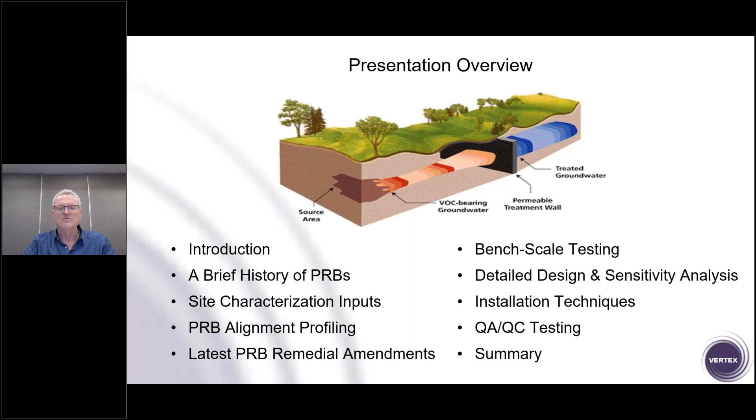As Mike said, my name's Kevin French. I'm a professional engineer here in Ontario. I've been in this game since 1988, doing remediation consulting work, and over the past 10 years or so doing the contracting side of things. Vertex Environmental, if you're not familiar with us, is a specialized in situ remediation firm that started in Ontario back in 2003. So we're coming up to about 20 years of business, and started out doing primarily ISCO work, but then has expanded over the years into also ex situ systems such as water treatment, multi-phase vapor intrusion, and also high resolution site characterization. You might be familiar with that, but I'll talk about it in the context of PRBs in a little more detail later.

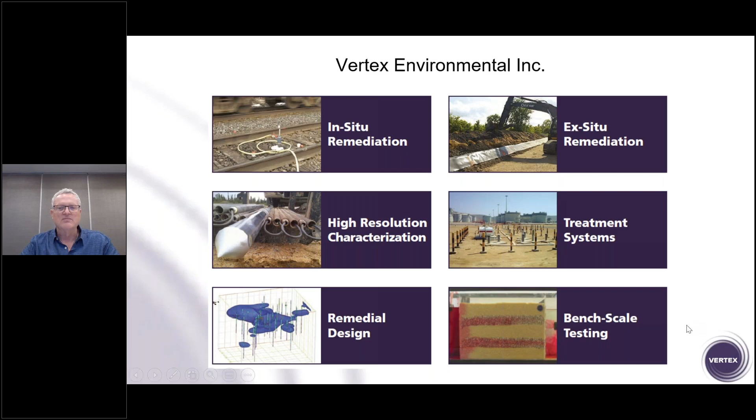Just an overview of the types of services we get involved in. I'll talk about bench scale testing and remedial design, because those are really some components that can be critical to designing an effective PRB.

Excavation and offsite disposal is decreasing over time, driven by cost as well as sustainability factors. We've seen a real switch in Canada, and you've probably seen it in the US as well, away from chemical oxidation and more towards chemical reduction. It may not be as fast, but it's more effective and longer lasting as a technology.

Similarly with bioremediation, there's a switch from aerobic to anaerobic, driven mainly by effectiveness. If you think about dissolved oxygen, it's not very soluble in water, so it's hard to get a lot of oxygen into the subsurface and maintain it. But it's pretty easy to get something else, like sulfate or nitrate, as a terminal electron acceptor into the water, with longer lasting effects and better distribution. So we've seen that swing happen.

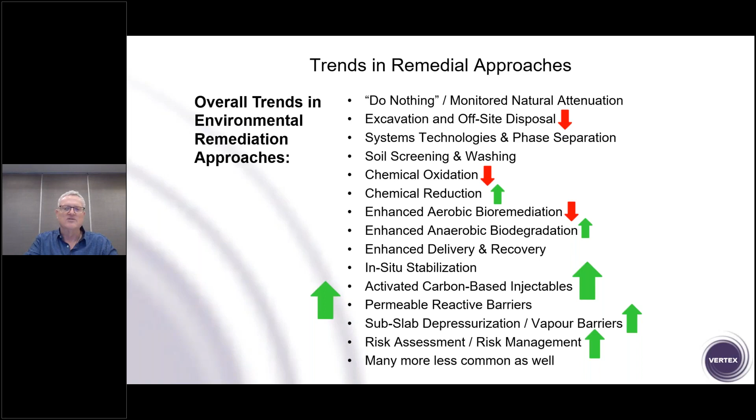Lately, we've seen a big upswing in risk management and risk assessment. A big part of that is developing site-specific standards for your contaminants, and then vapor intrusion mitigation, because in many cases there is no direct pathway to a contaminant short of inhalation. So vapor barriers are on the upswing, and in conjunction we've seen a huge uptake in both carbon-based injectables, which I'm going to talk about in detail, and of course the focus of this talk, permeable reactive barriers, also a pretty critical risk management tool.

So let's talk about PRBs, for those of you who are not familiar with them. It's actually not like a physical structure like a wall. It's actually a zone, if you want to think about it that way, constructed underground that allows groundwater to pass through it. That's why it's called permeable.

But then there's a remedial amendment built into that barrier, which reacts with the contaminants in the groundwater to either adsorb, destroy, or otherwise modify them, so that the water coming out the other end is treated to the desired limits.

So it doesn't redirect groundwater flow. It works passively, which means that once these are installed, there's no ongoing energy inputs required to maintain them. They may require some replenishment down the road, depending on the type of amendment, but they do last a long time, and they're very passive. So a great technology to install at your site to manage plumes.

There's various ways of constructing these, and I'll go through some of those, but basically they can be excavated—think about digging a trench and backfilling it—or you can inject remedial amendments into the ground to form these zones for a PRB.

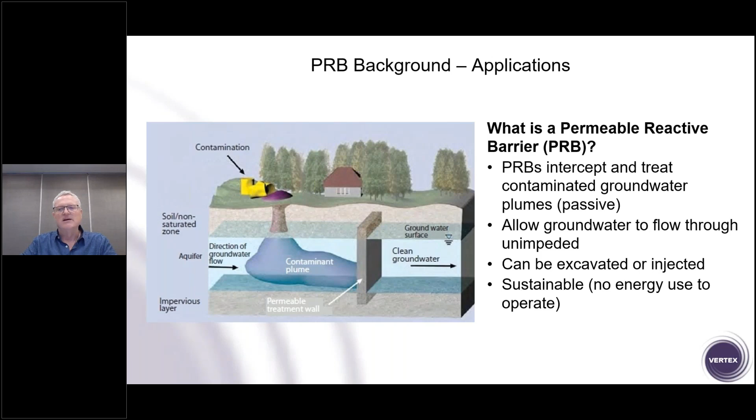Why would you need one? Well, basically they provide property boundary control. So if you've got a plume of contaminated groundwater, maybe it's leaving your property and could be exposing you to liability, or maybe it's coming onto your property from an uncontrolled source and you want to stop that from coming onto your property. They're perfect for those situations.

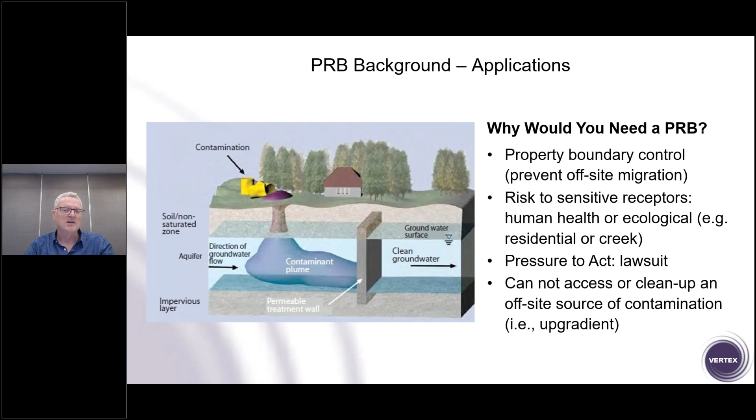They're also used to cut off risks to sensitive receptors using the same sort of technology and approach—maybe there's a litigation situation. But basically, they're not a source treatment, they're plume control. So they can contain plumes and treat plumes to prevent them from spreading and contaminating a larger area or an offsite area.

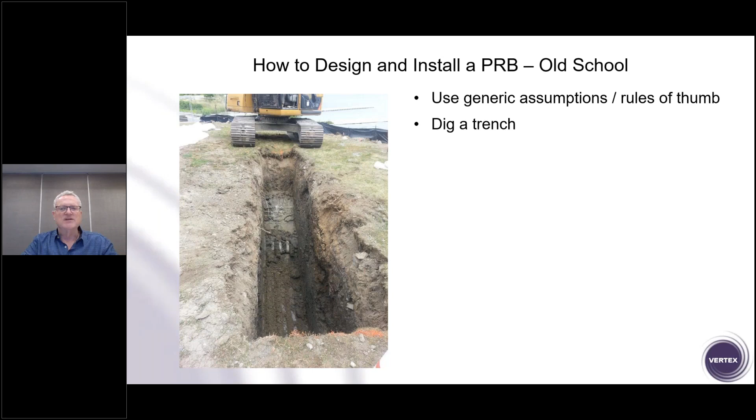So I've called this sort of the old school way of installing PRBs, and really the first ones were zero-valent iron. The way these were designed, maybe there were generic assumptions or rules of thumb that came into play. You dug a trench, intercepting your plume perpendicular to it.

You mixed up some zero-valent iron and sand using these rules of thumb again, maybe did some magnetic separation testing to characterize that the weight concentration was right. You backfill the trench, and then you hope for the best. If it was under-designed or poorly installed, you had failure. If it was over-designed, maybe you wasted money on the remedial amendment. So either way, it was not good.

But what if there was something unusual about your site—something that ZVI couldn't address, some unusual geological or hydrogeochemical characteristics? Then what? You were very limited in what you could do. So the question is, is there a better way? Well, yes, there is. There is a better way.

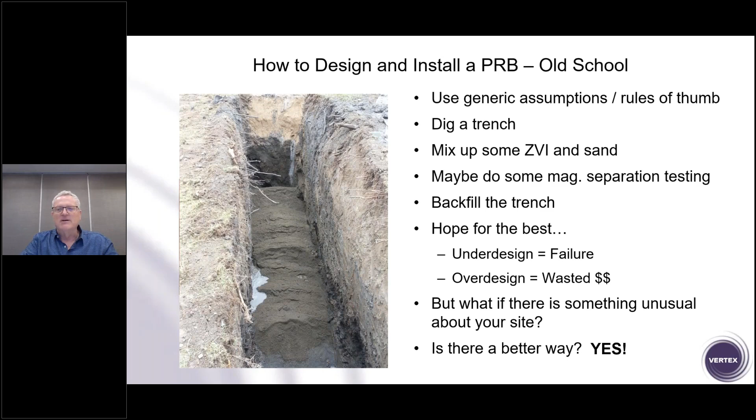So just to go back and touch briefly on zero-valent iron, if you're not familiar with it, it's essentially elemental iron. This was discovered at Waterloo, where I actually live, back in the 1980s, that it served to destroy chlorinated ethylenes.

And then there was a patent taken out. First so-called iron walls were installed in the 1990s. I believe one of the very first full-scale ones was in California. And they were at the time designed mainly to remediate chlorinated ethylenes like tetrachloroethylene or trichloroethylene, and heavy metals like hexchrome or lead, things like that, sort of multi-cationic heavy metal species.

And the nice thing about zero-valent iron, it's been well established, it's relatively inexpensive, and it lasts a long time. So some of these original PRBs that were installed back in the mid-90s or early 2000s, they're still operating today and they're still effective. So proven multi-decade longevity if these were designed and installed properly. So it's a great technology.

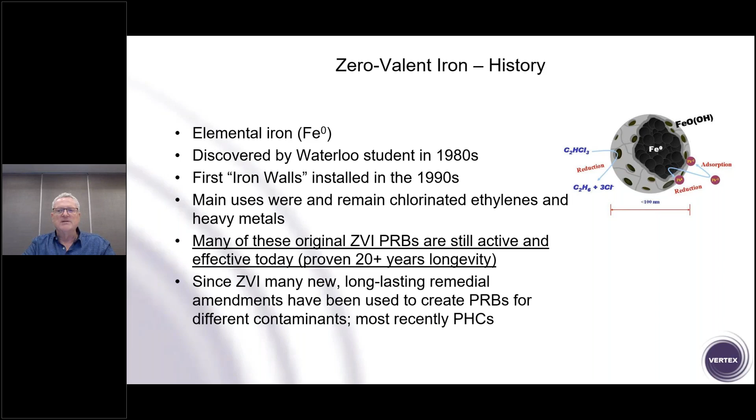But it does have its limitations in terms of what it can treat. And since that time, there have been many new long-lasting remedial amendments that have been developed that can be used for PRBs for other types of scenarios and different contaminants, and most recently for some of the other organic contaminants like petroleum hydrocarbons.

So as an environmental practitioner, you're probably much like we are here in Canada. The two biggest ones are chlorinated solvents and petroleum hydrocarbons. The zero-valent iron works for many of these chlorinated solvents, but we really didn't have anything that was truly a passive reactive media that could be used in a PRB for petroleum hydrocarbons.

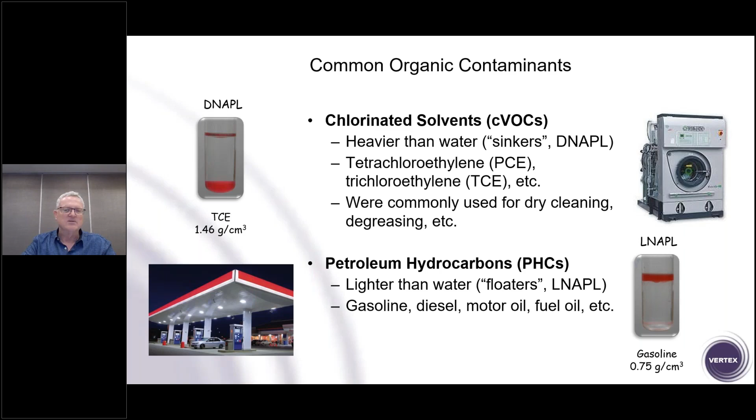But until we've had this relatively recent breakthrough of these carbon-based remedial amendments. And the one I'm going to talk about later on today is this trap and treat type of product, which combines the power of carbon adsorption with a treatment mechanism. So you have a destruction pathway as well, and that's very important. I'll touch on that more later.

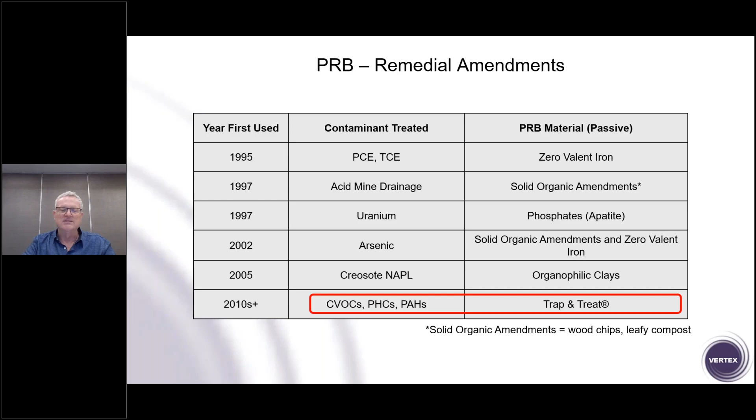In terms of designing and installing a PRB, the better way, I think, is to go back and look at this sort of engineering design process. I'm an engineer, it's the way I think. And there are definite steps that you can use as part of this process. So to relate them to a PRB application, the question is, what is the driver or the objective for the PRB? Why do you need a PRB in the first place?

Then you look at the characterization data that you have on your site. Do you have adequate information to do a design? Are there gaps of data that need to be filled in to improve your certainty? You can come up pretty quickly with some preliminary design options, and then maybe you need some more accurate or detailed site information in order to refine that design.

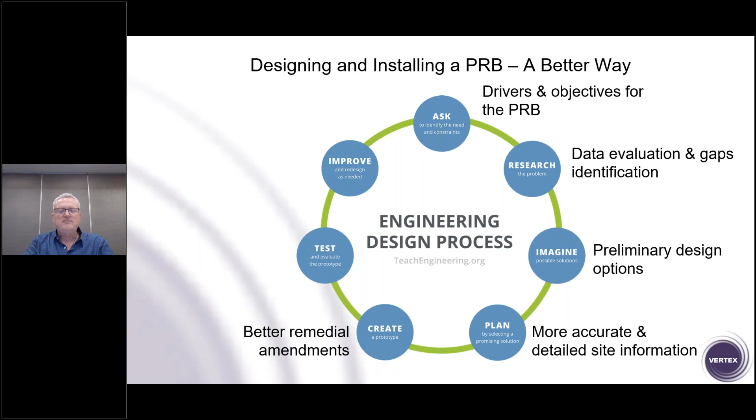You take a look at your remedial amendments. There are much better ones out today that are better engineered and designed for a PRB application. Maybe you need to do some bench scale feasibility and design testing to make sure that in theory, this design or this product will work for a PRB, but maybe there's something unusual about your site. It's got a fast groundwater flow, or there's a high mass flux across it. So maybe you actually have to do something a bit further to get some site-specific performance information.

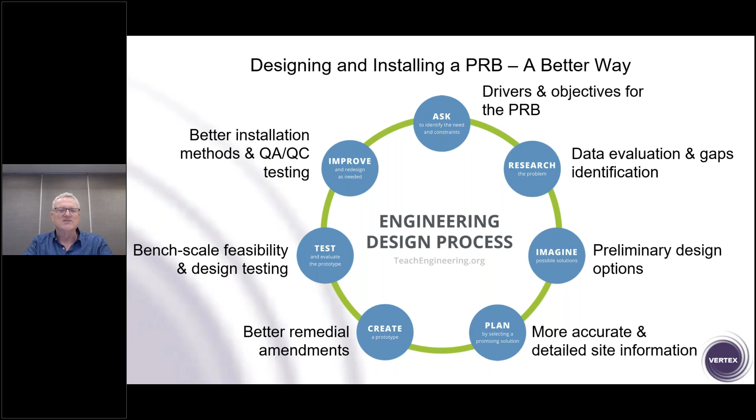And then finally, make sure that it's properly installed, and you do your QA/QC testing. And at the end of the day, ideally you have a PRB that is not only properly designed and appropriate for the type of contaminant and situation you're in, but it's been installed adequately, so it's going to actually perform as it was intended.

So let's talk about the site characterization inputs you need in order to design a PRB. And I've broken this down into sort of a wish list package, if you will. So at a bare minimum, there are certain things that you need.

So you need to know the contaminant type or types and concentrations, obviously. You need the effluent standard you're trying to treat down to. You need to know sort of the physical dimensions of this plume. How long does the PRB have to be? How deep is it to water? Where's the confining layer, so that you know what the saturated thickness of the reactive media has to be.

So we need things like plume maps, borehole logs, so we know what kind of stratigraphy you're dealing with. And also sort of the other drivers are the receptors. The receptors and the remedial objectives are kind of linked, but they go towards determining what degree of performance the PRB has to achieve.

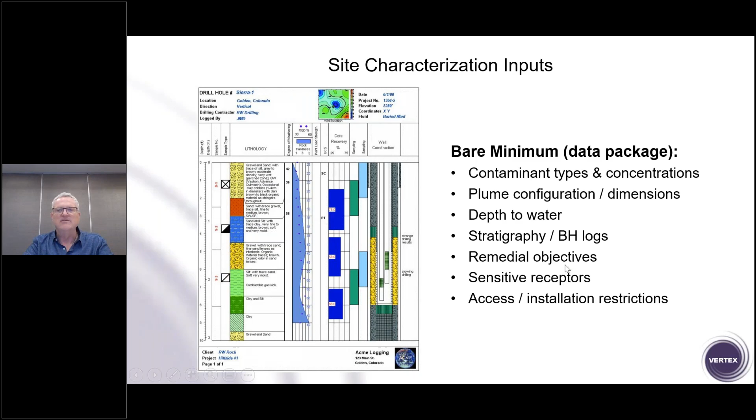And are there any physical restrictions in terms of access? Is there overhead hydro? Are you right up against a fence line? Things like that. A building - can you cut a trench open? Do you have to inject? That's sort of the bare minimum of information that we need in order to design a PRB.

An added benefit would be something like this: a 2D flow map of your plume, your groundwater level contours, so that we know direction, maybe seasonal variation. That is good information that will help us establish hydraulic gradients, combined with either estimated or measured K values. We know what the groundwater flow velocity is, or the range of velocities, which all leads into contaminant mass flux across the PRB.

As I said earlier, what's the base of the plume? Has it been vertically delineated? Is there a confining layer or not that we need to know about, that we can key into to cut off the lower extent of the plume?

And then also what the dynamic state of the plume is. Is this in a steady state condition, like a really old source of contamination that's just reached steady state, continuing to migrate at a relatively uniform concentration over time? Or is it a fresh release, and actually we're expecting worse levels of contamination to come across the barrier in the future? Or is it decreasing - do we have a depleting source where it's actually going to slowly tail off over time? So that's also important that we can take that into account on the treatment side.

For an injected application, is there a soil mass that's sorbed there that we have to take into account? Because depending on the amendment that you put in the ground, you may need additional measures to deal with the sorbed mass in the soil. And then lastly, groundwater field readings, things like pH, DO, ORP.

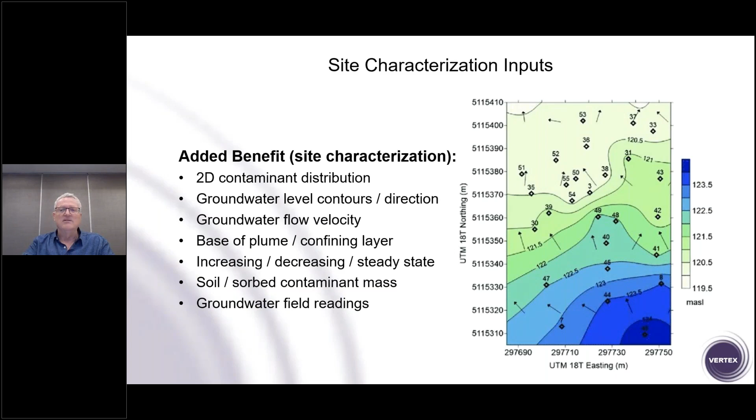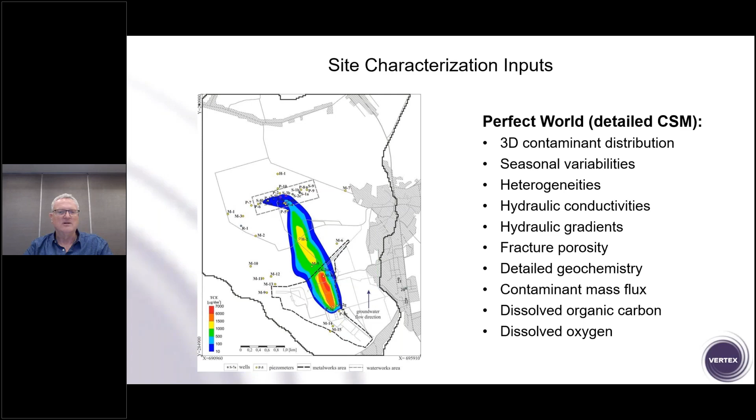You know, detailed geochemistry - has there been some mass flux calculations? And then finally, DO and DOC, because especially if you're dealing with some of the amendments that are carbon-based or iron-based, those will also exert a demand on the remedial amendments themselves.

Okay, so PRB alignment profiling. In some cases, you may not know, or maybe it's only at a high level, what your plume looks like because it's based on a series of monitoring wells that are spaced out maybe 20, 30 feet apart. So for a site characterization, it's probably adequate, but for a PRB design, maybe it's not granular enough.

So in that case, you can use what's called high resolution site characterization. These are direct sensing probes that can be used to gather a much higher amount of data in a relatively short period of time and for a low cost. There are different types of probes out there - they're all direct push, at least the ones we use. And you might be familiar with them, but they measure things like presence of free product, hydrocarbon based. So if it's mobile or sorbed, it will pick up NAPL.

Volatile, semi-volatile organic compounds can also be measured, along with permeability of the formation and where the water table is.

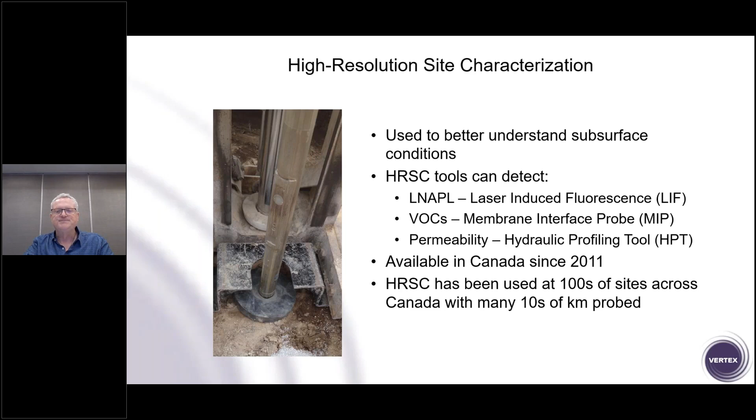These tools have been around for a long time. We've had them in Canada for 10 years, and they've been around longer in the US, used at literally hundreds of sites. So you may have run across them in your career. It's a very powerful tool.

I'll give you a couple of examples of what you can do with it. Here are some representative output plots of the laser-induced fluorescence, this one measuring petroleum hydrocarbon-based NAPLs. What you'll get is similar to a borehole log, where you get a relative response versus depth, which tells you where NAPL or sorbed NAPL is present, and a relative amount. The x-axis here is a relative concentration, and the color is a simulated color that indicates the type of hydrocarbon present.

In this case, this is more of a diesel fuel or heating oil type signature, and this is more of a kerosene type signature. It can also pick up gasoline or even down into the motor oil range type of hydrocarbons.

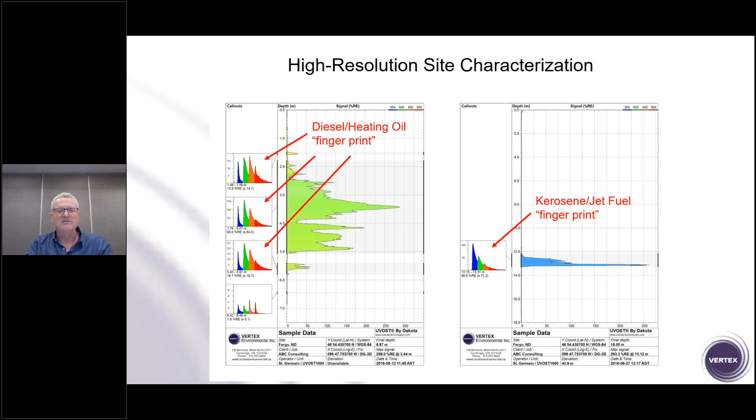This will give you much more incremental, granular information on where contamination is along your property line. There's also a tool called a hydraulic profiling tool. This one measures formation permeability and electrical conductivity, so it can be used to infer lithology. It will identify where the water table is, and you can also estimate hydraulic conductivity from that information.

So this is a comparison I put together of a borehole log and an HPT point that was driven right beside it. You can see the fill here has a fairly low hydraulic pressure, so fairly highly conductive material. Then we hit this clay layer and you can see the pressure increases, the hydraulic conductivity drops. We've got a sand seam, and then down below we have a pressure increase again.

Again, we're getting into more of those fine grain materials. But compare the borehole log here, where you have pretty crude and large zones of soil descriptions, with this more precise distribution of data provided from the hydraulic profiling tool. This will really help you identify things like these higher conductivity zones - maybe these are sand stringers, and maybe these represent preferential flow pathways that you might not otherwise be aware of.

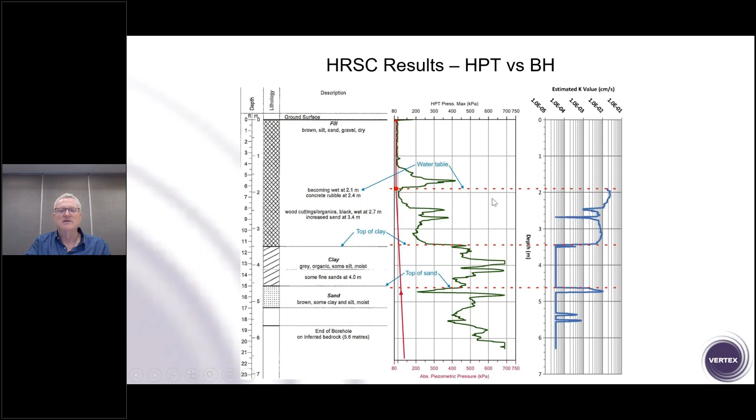Maybe this is where you have to load up a higher degree of remedial amendment in order to meet your discharge standards. So very powerful information. You can take that and then model it in 2D or 3D.

So this is the same site. This is a fence diagram for a funnel and gate PRB that we designed. You can see here really high flow zones up in the fill. The upper blue zone here is basically where the water table is, and then we've got more lower K zones, but we do have these interbedded sandier zones, stringers with a higher flux moving through them.

And then finally down here, this dark blue layer is the silty clay till layer, so this is our confining layer. Based on this, you have a really accurate profile of how deep your PRB is going to have to go in order to key into this confining layer, so that you know you've got not only horizontal capture of the plume, but vertical capture of the plume as well.

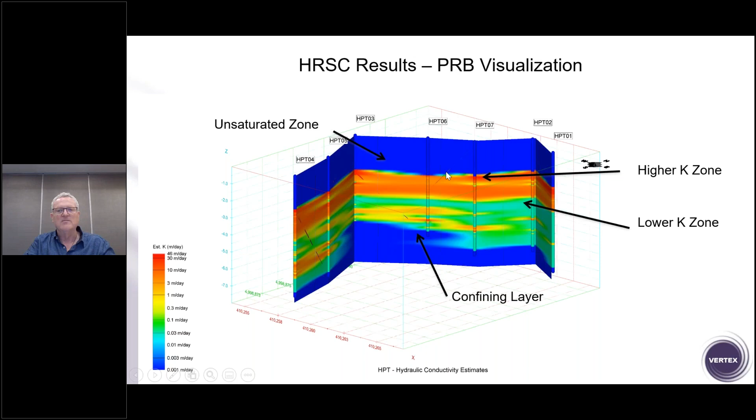And with the information on the level of the water table, you know how high up then your reactive media also has to come.

Now we'll get into some of the more recent remedial amendments. The one I mentioned earlier are these carbon-based injectables. They've been around in Canada since 2015 or so, much earlier in the US, early 2000s.

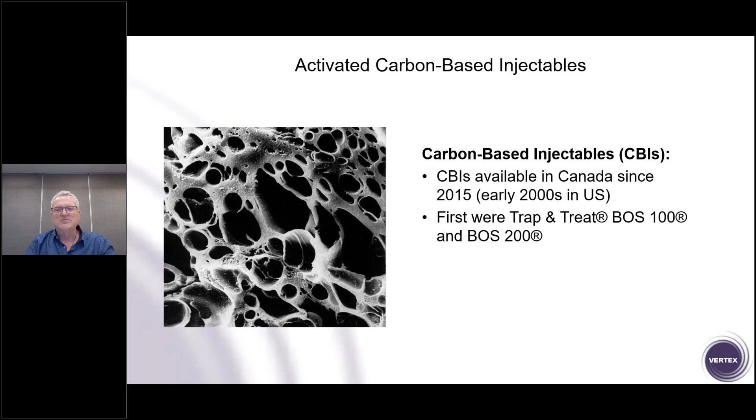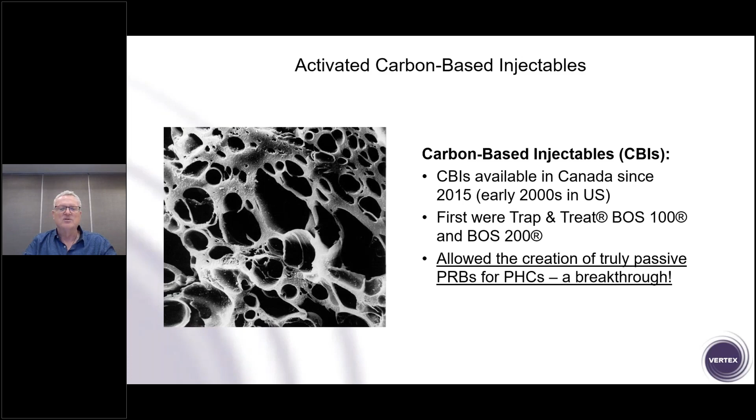The first were these trap and treat products, BOS 100 and BOS 200. I think this is one of the biggest breakthroughs in my career on remediation, especially the BOS 200, which treats petroleum hydrocarbons. This is the one that allowed for a truly passive PRB to be developed for petroleum hydrocarbons. That's a real breakthrough. The way it works is you've got activated carbon.

Here's a microscopic view of it. You can see it's like a sponge, so it absorbs organic contaminants very effectively out of the water.

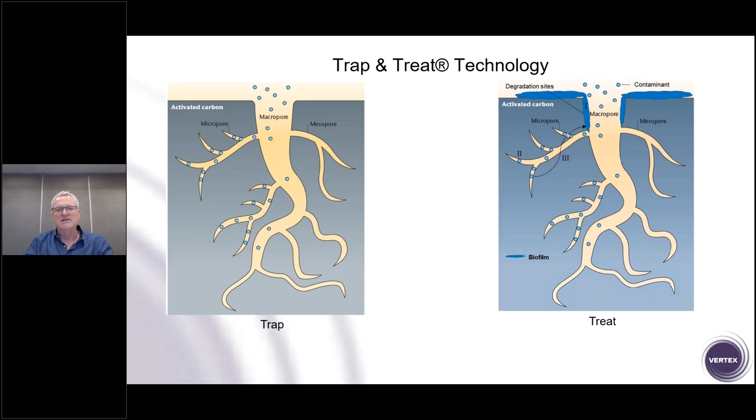But then you have a treatment mechanism as well. Without a treatment mechanism coupled with your activated carbon component, the carbon is going to become saturated with contaminants and won't be able to adsorb anymore, it's going to be useless. So you need this treatment mechanism that will degrade those adsorbed contaminants and allow those adsorption sites to be regenerated, allowing it to adsorb more contaminants over time. In effect, this technology regenerates your carbon in situ and allows it to last much longer.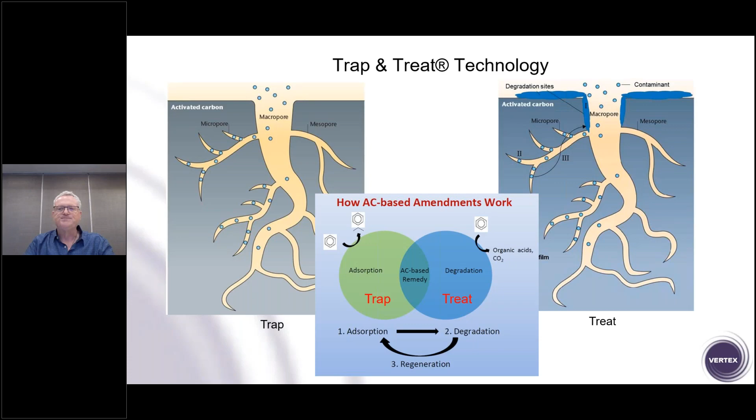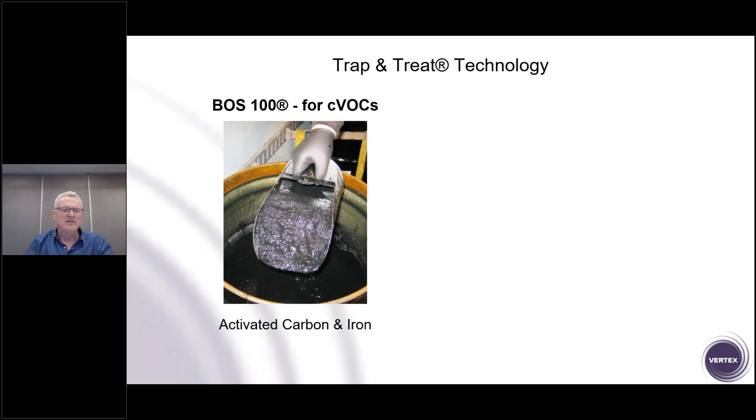The treatment mechanism for these two in particular: the BOS 100, for chlorinated solvents, is essentially activated carbon and elemental iron, so adsorption and chemical reduction. For BOS 200, for petroleum hydrocarbons, it's carbon adsorption and enhanced anaerobic biodegradation, so biostimulated and bioinoculated degradation of the hydrocarbons.

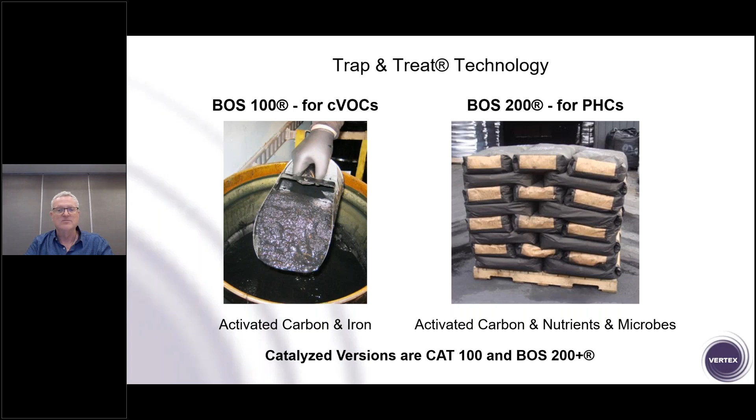Since these first two amendments came out, there's been a new generation that's essentially catalyzed versions of these that will allow them to deal with more recalcitrant compounds and higher absorbed soil mass. These will overcome some of the limitations you'll have with the adsorption capacity on the carbon component.

Now I'll talk a bit about bench scale testing. We've got all of our site characterization data, so we know what our contaminant situation is and what our flux is across the plume. But maybe there's some uncertainties, or we need proof of concept for a regulator or a client. In that case, you can do bench scale testing.

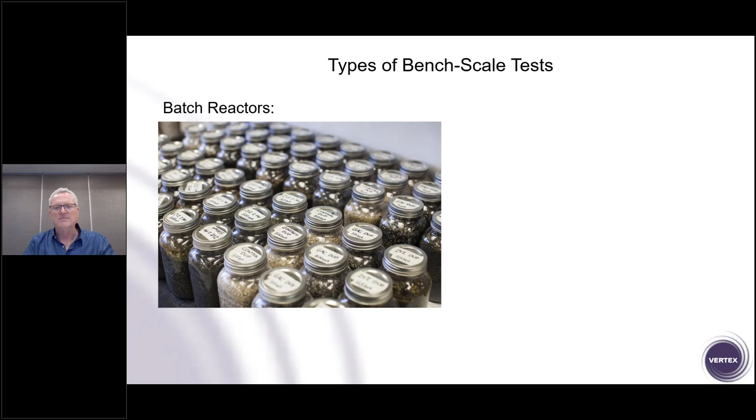There's different types of tests you can do. There's sort of quick and simple batch reactors, basically filling vessels with various mixtures of remedial amendments and your contaminant groundwater, letting it come into contact for a set period of time, decanting it off, analyzing it, and seeing what kind of treatment you get.

Or there's a flow-through, more dynamic reactor, which I think is a better simulator of a PRB, because you take contaminated groundwater from your site and pump it at a slow rate through a column filled with your theoretical or hypothetical PRB remedial admixture, and collect the effluent coming out the end to analyze.

Here's an example where we were testing three different combinations of remedial amendments, and this is a control column which is just filled with sand, so we can differentiate between the effects of the apparatus and background media versus the actual performance of the treatment media.

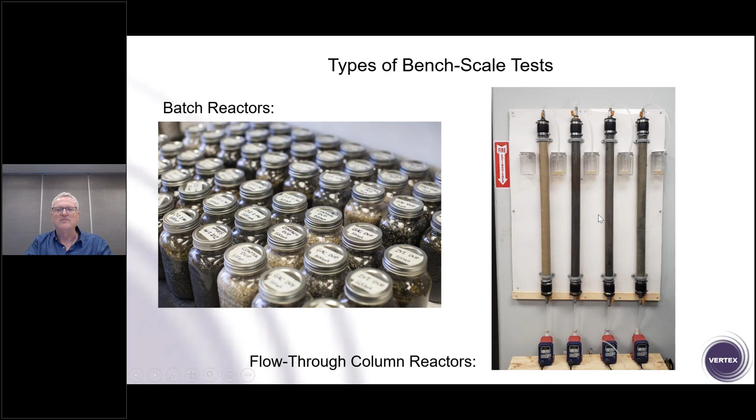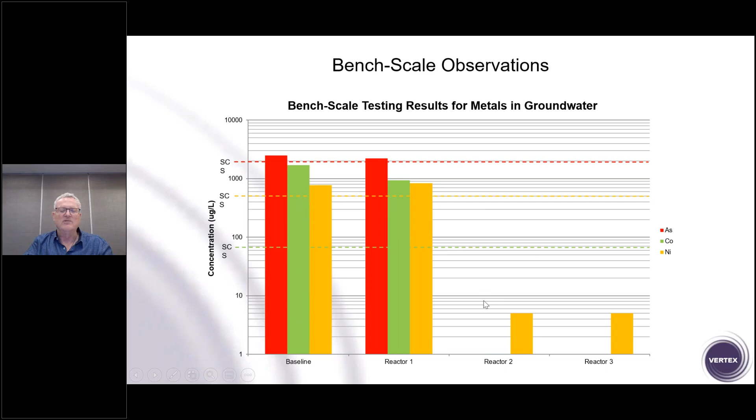What you can do with this is look at overall performance. Here's an order of magnitude comparison of data for arsenic, cobalt, and nickel. Here's our baseline untreated groundwater, here's our reactor 1, which is the control, and then here's two different treatment media combinations. You can see the overall percent reductions you can achieve. In this case, we're seeing three orders of magnitude reduction, which is awesome.

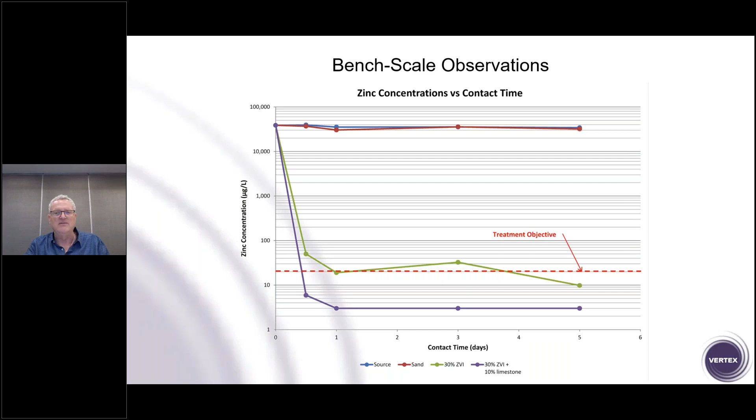You can also evaluate degree of treatment given contact time. Here's some plots showing treatment given different contact times in terms of days. This comes into play when you have a fairly high groundwater flow velocity, and you know what your PRB thickness or width is, perpendicular or parallel to groundwater flow. So if it's a yard wide, how long does it take groundwater to flow through that? That's your contact time, and you can evaluate whether you have enough reaction taking place in your PRB given that contact time to achieve your treatment objective.

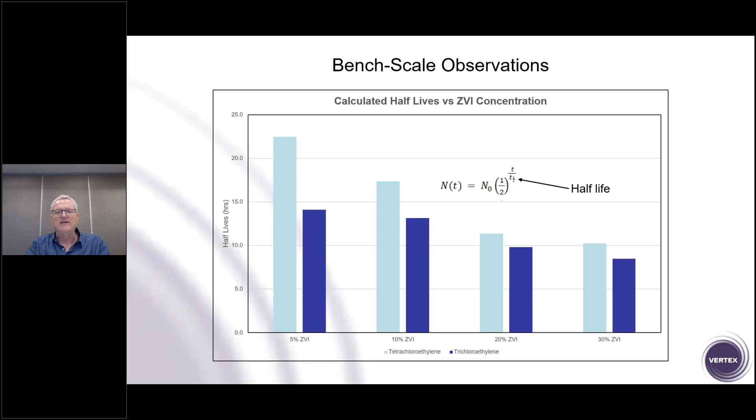The last thing you can do is look at the degree of treatment over time as a function of contact time and calculate a half-life. For certain types of amendments, you can look at the amount, in this case ZVI, that you need given your contact time in order to get that number of half-life reductions to meet your treatment objective. Because in many cases these reactions take place on a first-order decay curve, you can estimate half-lives and come up with a more accurate design.

Then we get into a more detailed design. So we've done our characterization, we've done our bench scale testing. Let's do a detailed design.

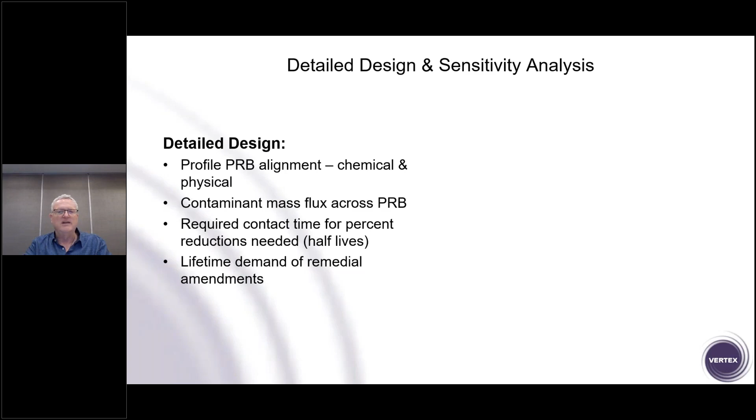So we know what our alignment is, the chemical and physical characteristics of the site. We know what our mass flux is across the PRB. We know what our contact time requirement is in order to get that degree of reduction needed. We can also estimate the lifetime or duration that the remedial amendment is likely to last based on that mass flux of contaminants across it.

We also have some requirements for contact of the remedial amendment with the contaminants in the plume. There's a minimum density requirement you need, because in most cases these are either injected into the formation or mixed with coarse sand and placed in a trench. You have to ensure that with any type of in situ remediation, it's a contact sport. So if you don't have enough minimum density distribution of your amendment, the groundwater plume flowing through that PRB might not contact the amendment, and you might not get the degree of treatment needed coming out the other side.

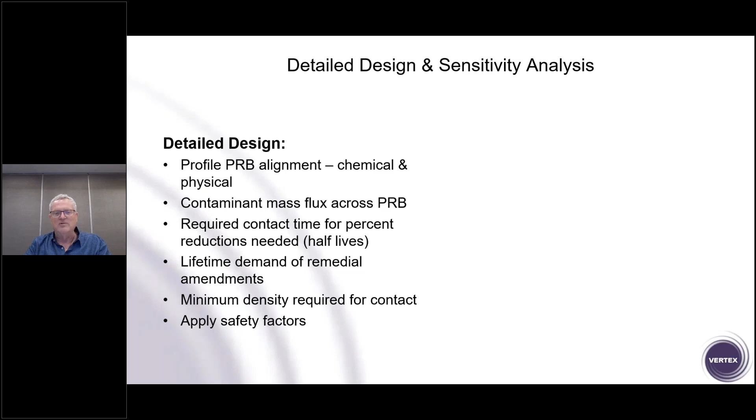It's always a good idea as an engineer to apply some safety factors, because you're never going to know 100% exactly what's going on in the subsurface. There's always heterogeneities, there's always some unknowns. So applying a safety factor is good practice. I'd suggest a 100% factor of safety is a good idea. Typically that's not outrageous from a design perspective or a cost implication on your PRB.

You can also get into sensitivity analysis. There's always some variability in your parameters and some uncertainties. These are the two big ones, because they can vary by orders of magnitude on any given site, whereas the others vary less than an order of magnitude. So it's important to have really good information on at least these two: your concentration distribution of contaminants across the plume, and any variability in your hydraulic conductivity in the subsurface, because that's going to drive your design.

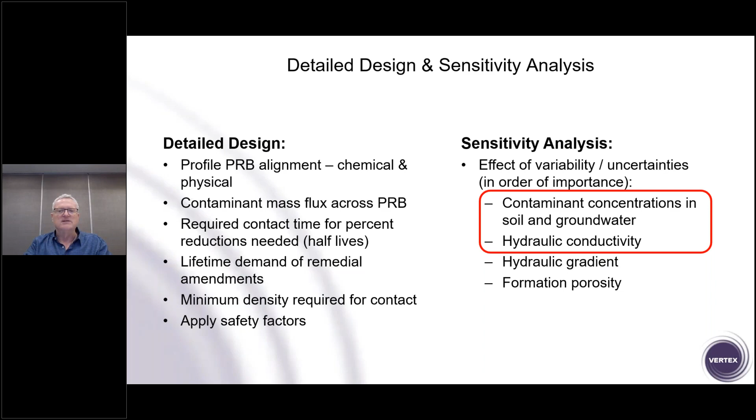Now, from an installation perspective, there are a few ways to do it. The basic one that's used a lot, if it's possible, is straight excavation. So you dig a trench and backfill it with your reactive media.

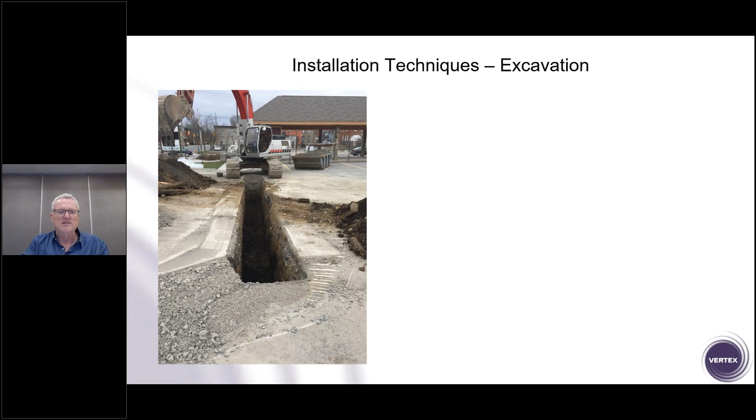In this case, if it gets too deep and you don't have room for cutting a slope for sidewall stability, you can go with a biopolymer slurry. Basically this is like a guar gum or something similar that you pump into the excavation. As you get down below the water table, it keeps hydrostatic pressure on the sidewalls and keeps it from caving in. Then you can place your remedial amendment mixture through this.

A word of caution on this approach: when you're mixing different types of amendments, they'll have different densities. Typically they're mixed with a coarse sand. If you're mixing something like zero-valent iron, it's much heavier than sand. If you're mixing something like a carbon-based amendment, it's much lighter than sand. So you have these density differentials. And if you create this mixture above ground and pour it from the top down through this guar, you're going to get density separation - all your ZVI will be on the bottom and sand on top, or sand on the bottom and carbon on top. So there are some tricks to installing amendments through this type of mixture to make sure they stay mixed and uniform.

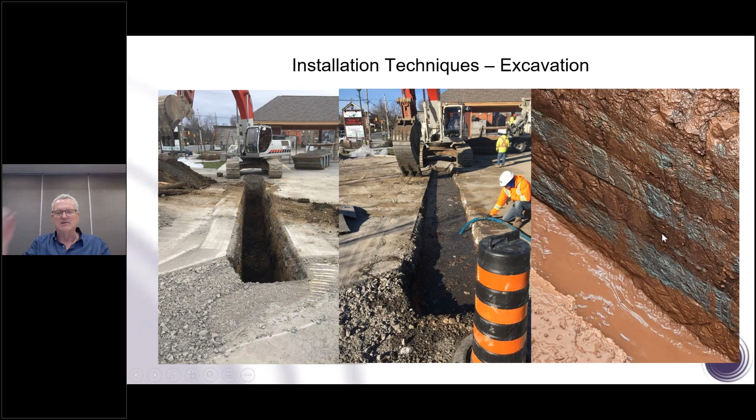And you can even cut these trenches through bedrock. This is a site we recently did where it's cut through these interbedded layers of shale and limestone.

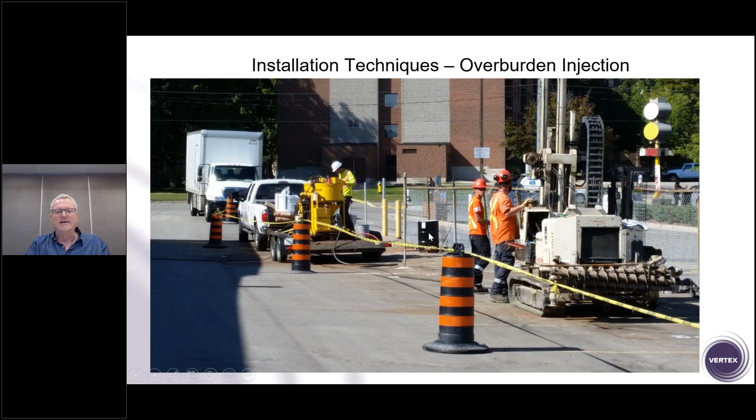If you can't dig a trench for whatever reason, stability or depth, you can go with an injection approach. In this case, we're injecting zero-valent iron along a property line through a series of direct push points. The key is to ensure as uniform distribution as possible of your remedial amendment in the subsurface.

If you think about digging a trench and mixing your backfill above ground and placing it, you've got 100% interception of the plume because you've dug from the water table down to the base of the plume or confining layer, and filled the whole thing with media, so groundwater moving through contacts it. From an injection point of view, though, you don't have that cut. You're not completely transecting that plume 100%.

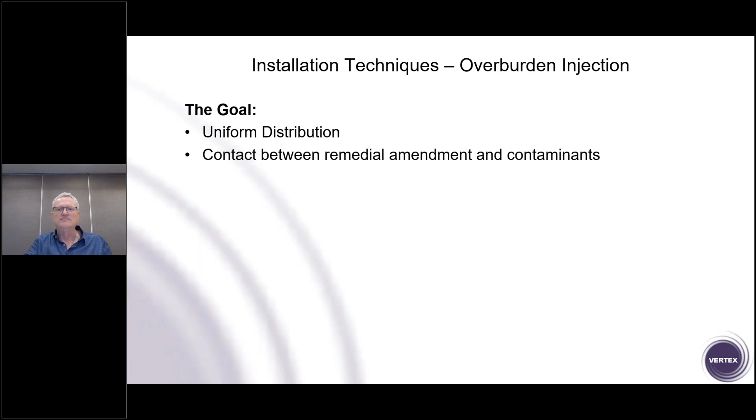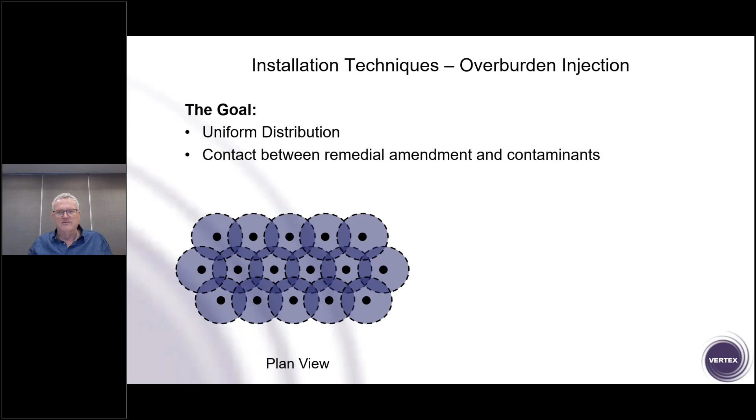You're injecting things, so to ensure distribution, you have to do a series of injection points on rows that are offset with overlapping ROIs, radius of influence of your remedial amendments. Then on a plan view, you get an interlocking set of influence with your remedial amendment when you inject it.

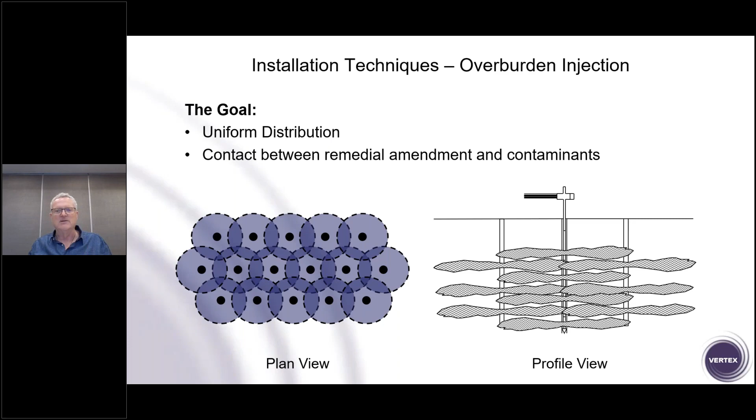Similarly, vertically, you offset these points so you get these interlocking fingers of remedial amendment in the subsurface. When you use a tight enough spacing and a small enough volume injected at each point, you basically overcome heterogeneities to the extent possible with an injection approach, ensuring as uniform a distribution as possible so the groundwater plume moving through it contacts that remedial amendment.

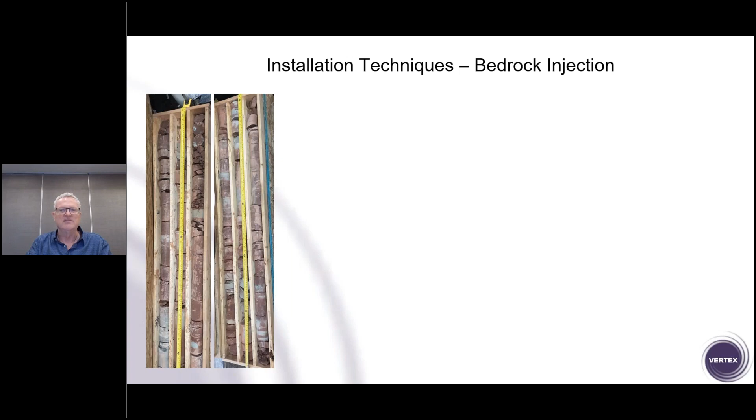Now, when you get into bedrock, it's a bit more challenging, as you can expect. You can't just drive a geoprobe point or direct push point and inject it. You have to do something else. You have to drill a hole down into the bedrock, and what we've done is incorporate technology from the oil and gas sector with pressure packers.

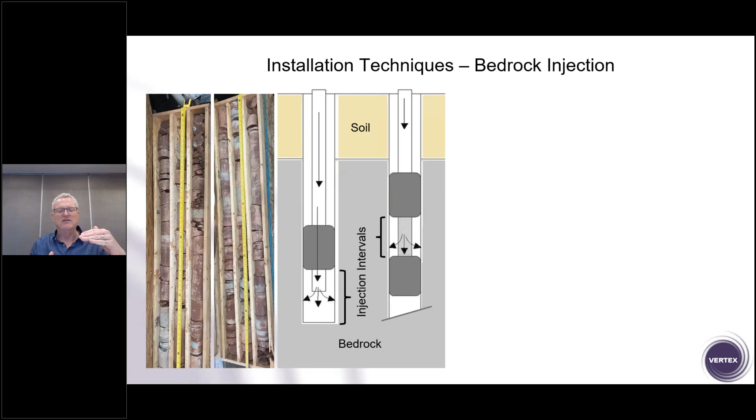You can do a single packer or a straddle packer type assembly, but basically you drill an open hole, cased off through the overburden to keep it from caving in. You lower down your packers, isolate off the fracture zone you want, inject out into that, and move down to the next one and so forth.

Packers look something like this, where you'll have inflatable bladders at each end, and in the middle, this is the injection interval. You lower this down, inflate the bladders, they seal against the side walls of the borehole, and that allows you to inject out just in this interval.

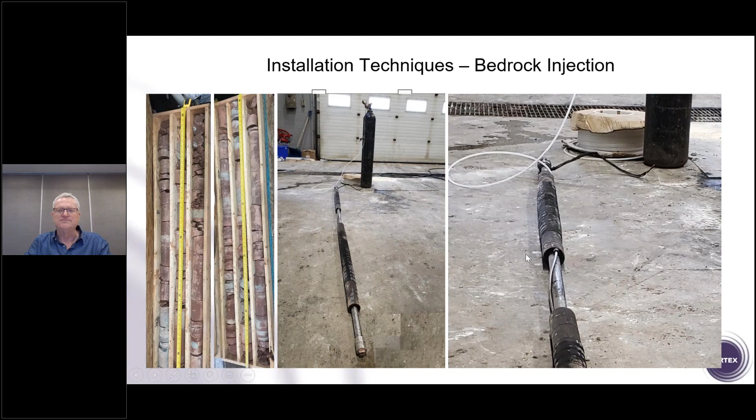Now, in some cases, the bedrock is not competent enough to stay open without caving in. In that case, you can move to something like this, a pre-drill or GeoTAP type approach, where you drill down through the formation. We've used this on really tight overburden soils, like dense tills or soils with cobbles and boulders, or even bedrock. This would be like a sonic pre-drill.

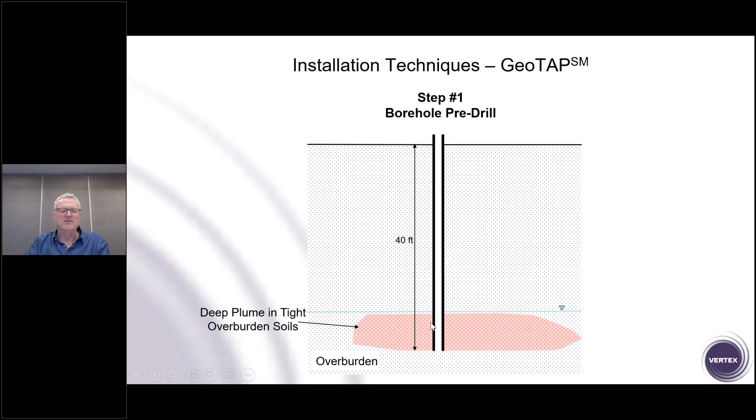We drill down through the zone where we need to do our injection, and then backfill it with a bentonite grout mixture as you pull the casings up. This creates a conduit down that will keep the sidewalls from caving in, but will allow you to come back and do a direct push down through it.

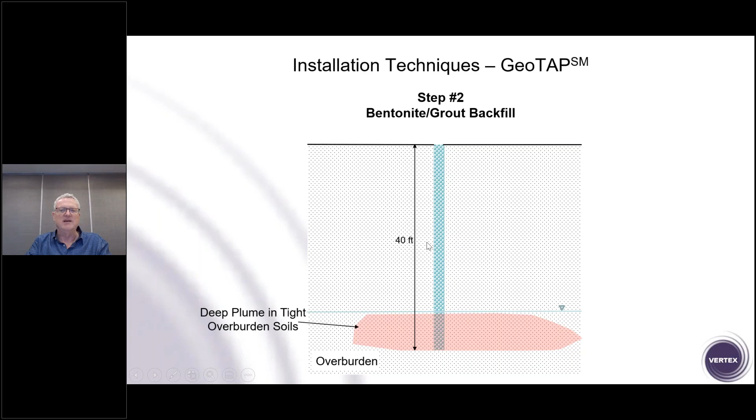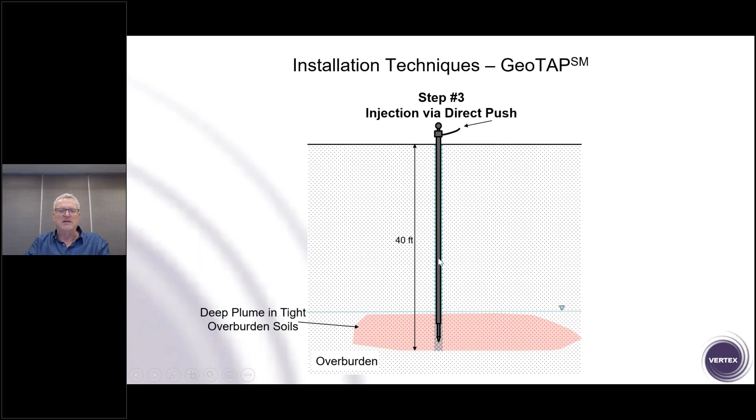So then you can come back with your geoprobe, drive down through this bentonite very easily, and then inject out into the formation under high pressure. This allows you to emplace through tight materials or unstable bedrock and still do an injection approach for your remedial amendments.

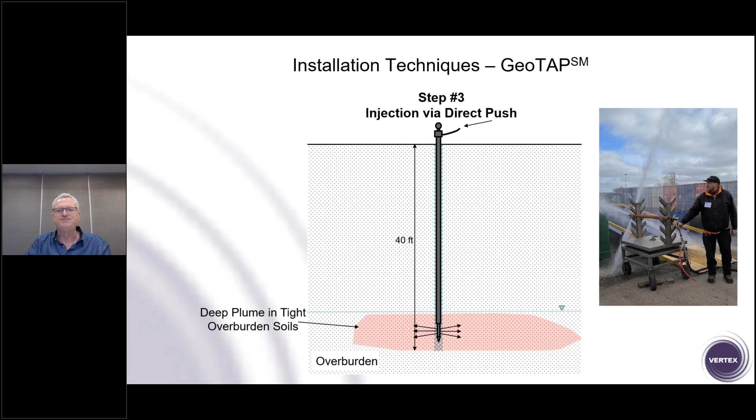So then the last part is QA/QC testing. You've gone through all this effort to properly design and install your PRB, but you want to make sure that it was installed properly. So you need to do some QA/QC testing.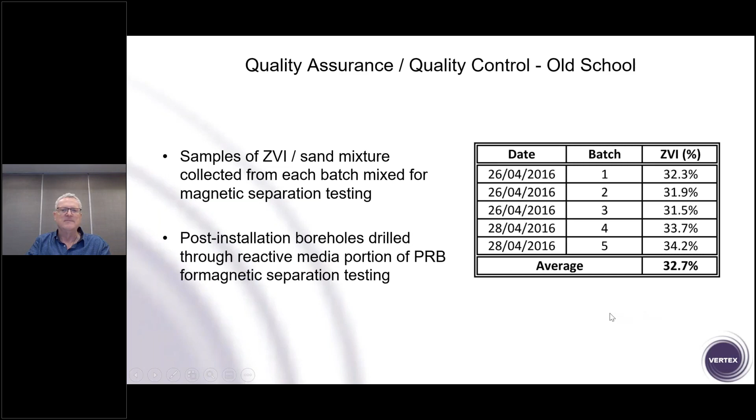Historically, the old school way was you would collect samples of your sand and ZVI mixture above ground, do some magnetic separation testing on it, look at the distribution and the average, make sure it's above what your target limit was. And then maybe you would go in and do some post-installation boreholes actually through the media and collect samples and do the same type of testing.

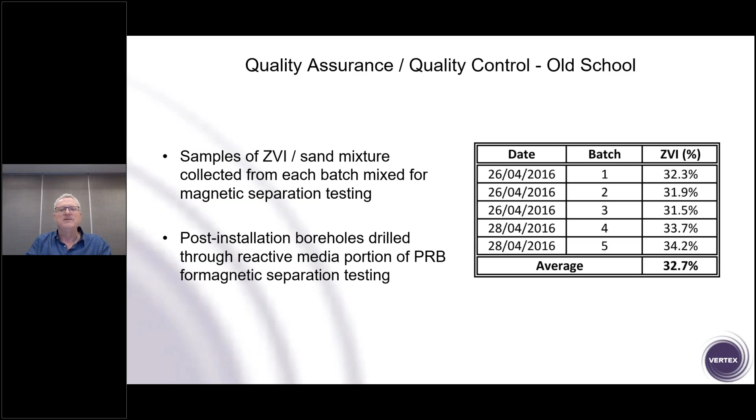But you can actually get much better data now by using magnetic susceptibility testing for ZVI content. And if you were using a carbon-based amendment, magnetic susceptibility or separation won't work. So there's now a colorimetric dye adsorption testing that can be used for those amendments.

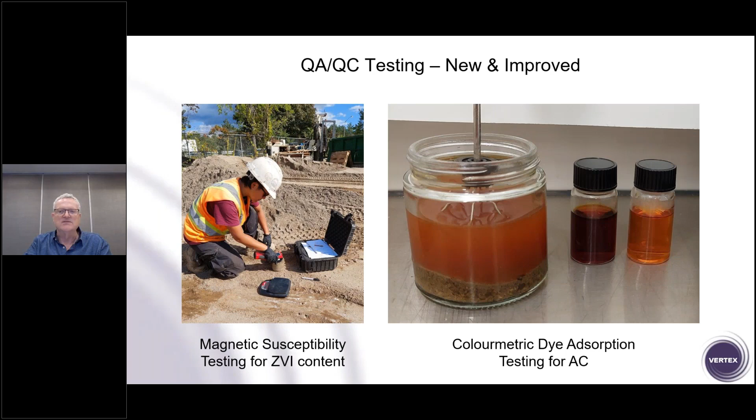Originally, for ZVI, you could do magnetic separation testing. But with magnetic susceptibility testing, you can do something like this: create a calibration curve where you generate mixtures at different concentrations by weight of zero-valent iron and sand. You take your magnetic susceptibility reading and get a correlation line. And then when you're out in the field, you take your samples at whatever frequency you want and very quickly take a reading.

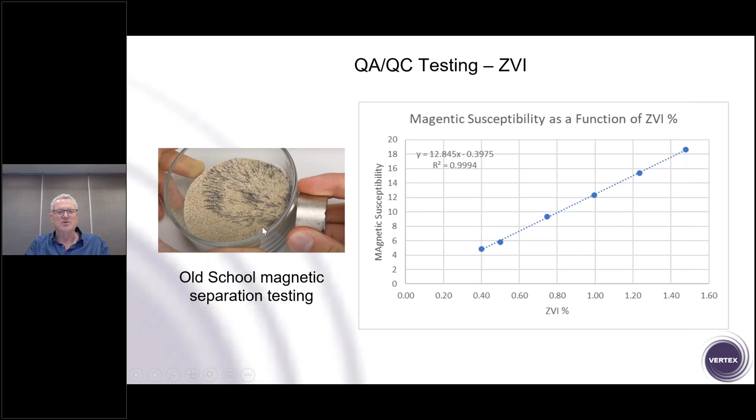Compare it to this calibration, and it will give you the percent of ZVI in those samples. It's very fast, very accurate, and much more quantitative than the old approach, which is open to a lot of variability and margin for human error.

And then with the dye adsorption testing, you can do a similar type of thing. Basically, you take a set mass of soil, you react it with a dye mixture, and then colorimetrically measure the difference in the amount of light that gets passed through that mixture and correlate that to a carbon concentration.

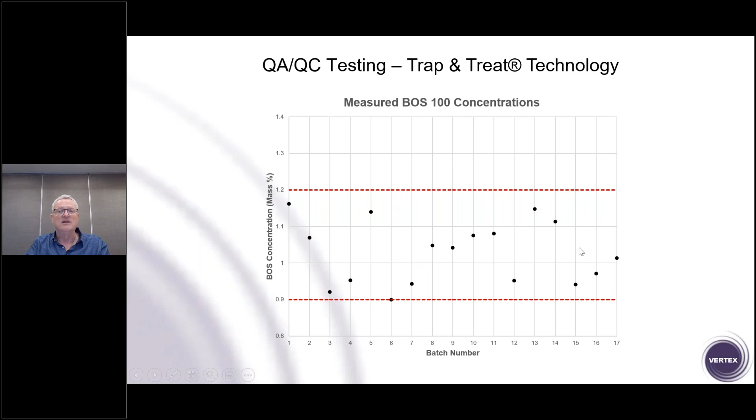And then the ultimate validation for the PRB basically is its performance. So what is the influent versus effluent concentration? This is going to require consultants to go back to the site and do their routine groundwater monitoring and measure things like the changes in the geochemistry. Is it shifting in the direction we want it to shift based on the amendment that we're using?

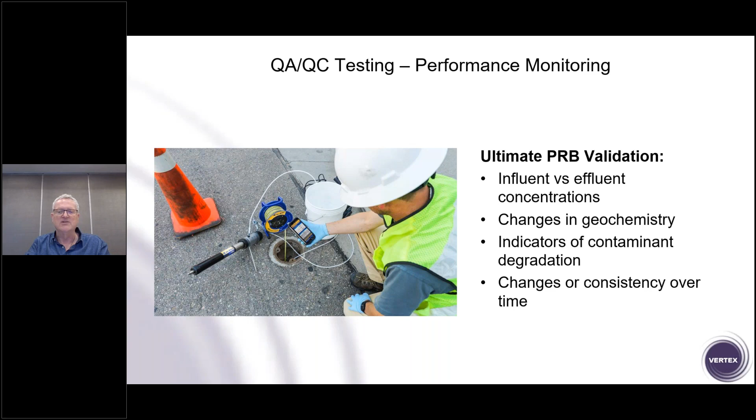Are we seeing the degree of treatment that we want? Are there indicators of degradation happening in the effluent? And what is the performance like over time? Is it consistent or is it changing? So ultimately, that's your final test.

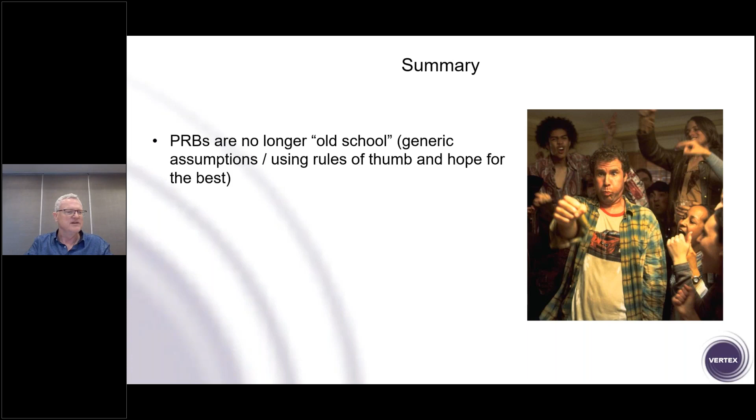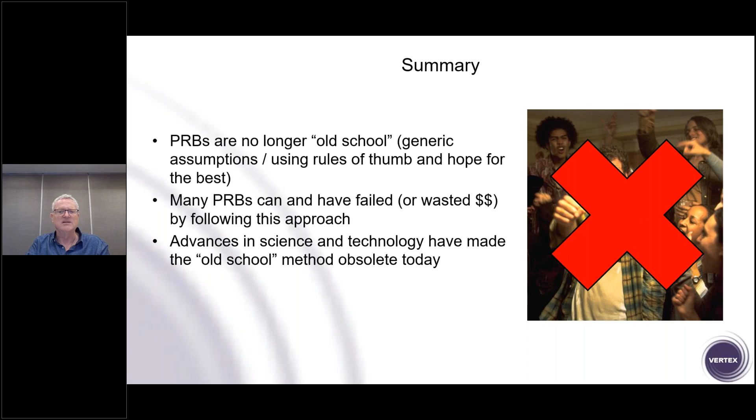So just to summarize things, PRBs, I would say they're no longer old school, where you use sort of generic assumptions and rules of thumb, because in many cases they have failed or wasted money following that approach. There's been many new advances in technology to make that method obsolete, and it's possible now to more intelligently design and install and validate these PRBs.

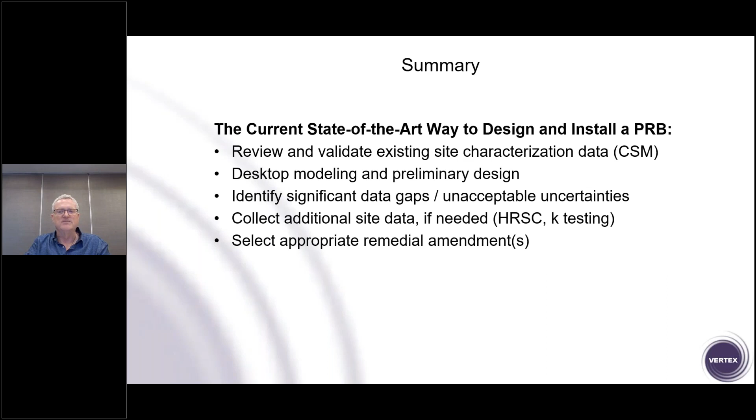And that would be coming up with a comprehensive site characterization model, doing some desktop modeling and a preliminary design. If there are data gaps or unacceptable uncertainties identified, filling those in. Maybe that's doing some high-resolution profiling, maybe it's collecting some K data on the site, making sure you select the right amendment or amendments. Do some bench scale testing if you need to, if there's something unusual about your site or you need actual demonstrated proof of concept performance.

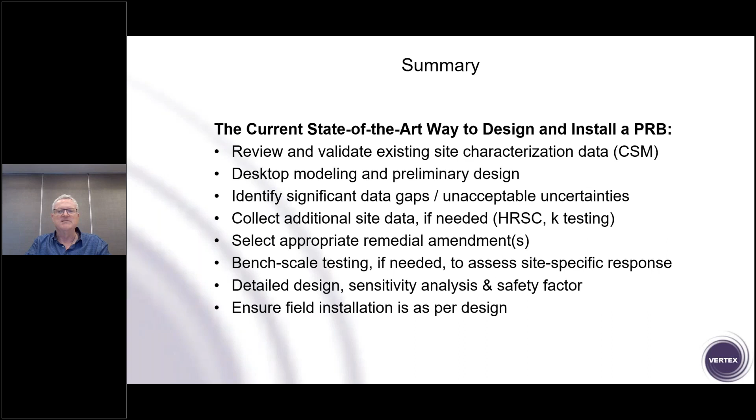Then do your detailed design, sensitivity analysis, apply a safety factor. Absolutely make sure it's installed as per the design, and do your QA/QC testing as final confirmation. And at the end of the day, then you'll learn to love PRBs like we have here.